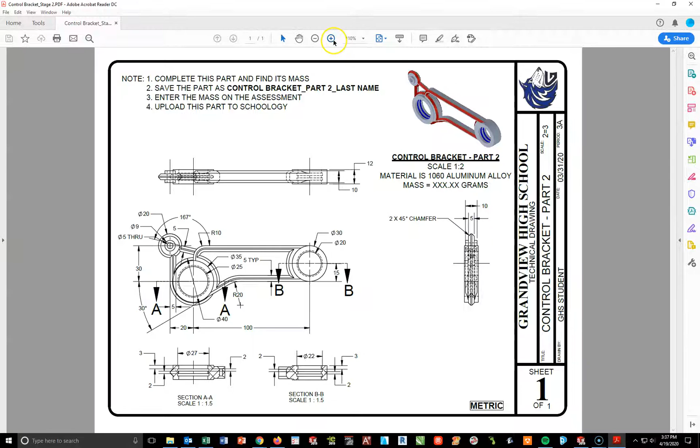The only thing I'm seeing that's different between our original and what we were working on is the distance for this upper circle: instead of 15 it has been moved to 20, and the height instead of 35 has been reduced down to 30, with this angle from 135 turning to 167. Everything else remains the same.

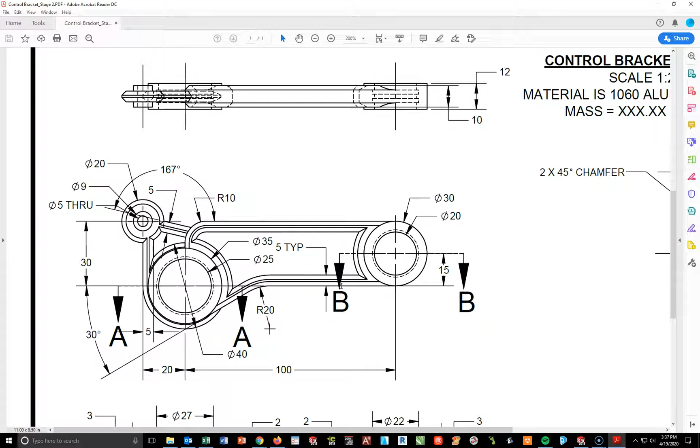The one thing that is being added in, though, is there are two cuts on the inside of each of these circles that we'll have to add in. And what we're going to have to do is actually create a plane that we will end up working with. Since we have our front plane in the middle, we can create a plane that will be based on just an offset at 1 millimeter out.

And then we're going to create a circle on that plane and do a 2 millimeter cut. Okay. If I do that, that puts us in the right spot. We're going to do it on one, and then we're just going to mirror it over. So that's the only other thing we have to add. Oh, and the last thing is we've got to get rid of the thing in the middle here. So this is one big piece. So really, it's just a couple things we have to do to modify this.

Okay. And then now we'll make sure this is done. Beyond that, I think that's all we have to do here. So I'm going to go ahead and get back into my original part. So here is what we finished up with part number one. So now what I'm going to do is kind of come back.

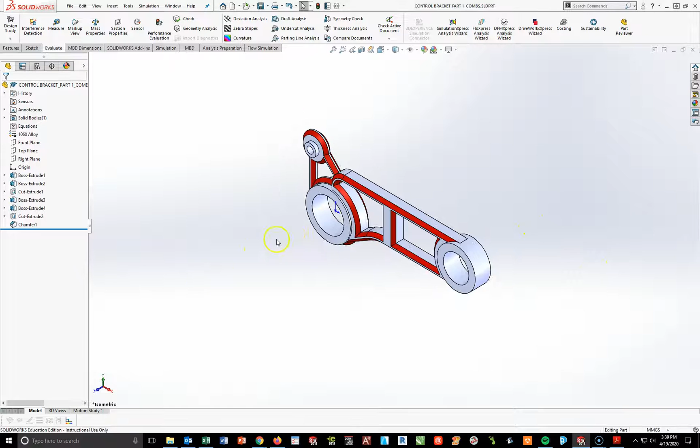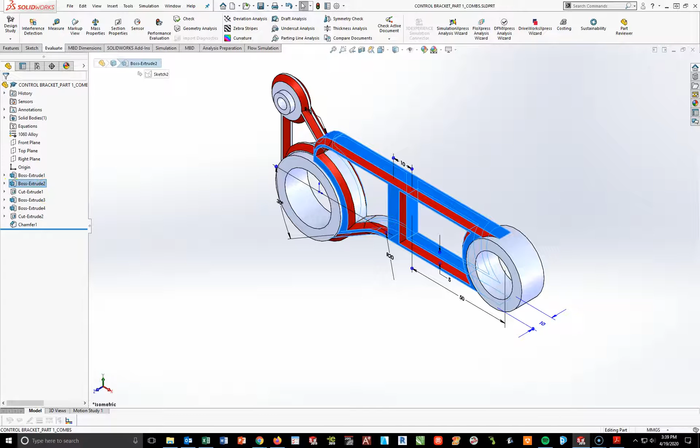These numbers on my first extrusion are okay. It's still a 12 millimeter extrusion. They're still 20 and 30 on the sides of the circle. It's still 35 and 25 on the circles in the back. So that is good. Okay, this extrusion here, I'm going to have to actually go in. What will happen is I'll get rid of this little cut right here. I'm actually going to go into the Boss Extrude 2.

We're going to go in here and edit the sketch, spacebar, Normal To. Now, all I'm going to do in this case is get rid of this vertical line right here, yes, and this line right here, and yes. And then all I'm going to do is just pull this to attach. In this case, I'm going to delete that line and drag this all the way to the back. Okay.

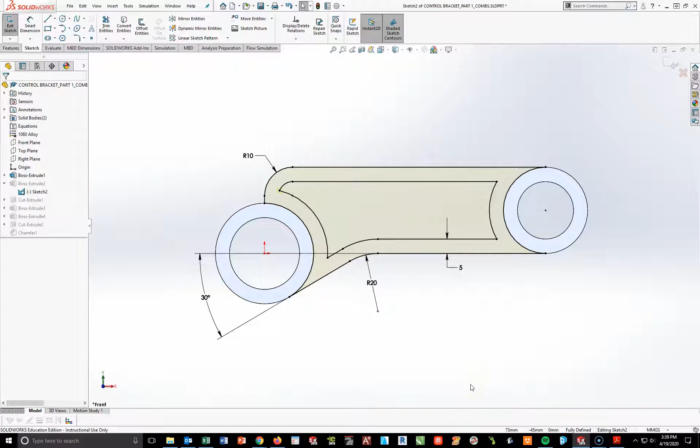This right here, I'm not quite sure if it's just because it's missing a tangent, so maybe I'm just going to add a quick tangent relationship there, and that looks like that's all that was missing. Okay. This was still posing a problem up here earlier. I'm not sure why that is a problem. Let me see if I can go through and do the extrusion. I'm going to continue to ignore.

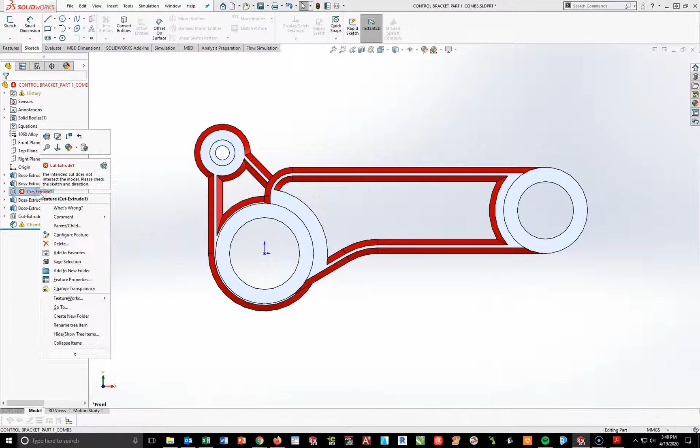Okay. Now the reason this came up is because, if you recall, on the first one I had to do that additional cut. Okay, well now I don't. So all I'm going to do is just delete this, get rid of that cut, get rid of this sketch. Okay, close, right click, and delete this sketch. Okay, so now I am back to where we originally were. Now, as you can tell, I ended up losing all my chamfers by making that cut because the chamfer was part of that. So in the end, I'm going to have to come back and add that on.

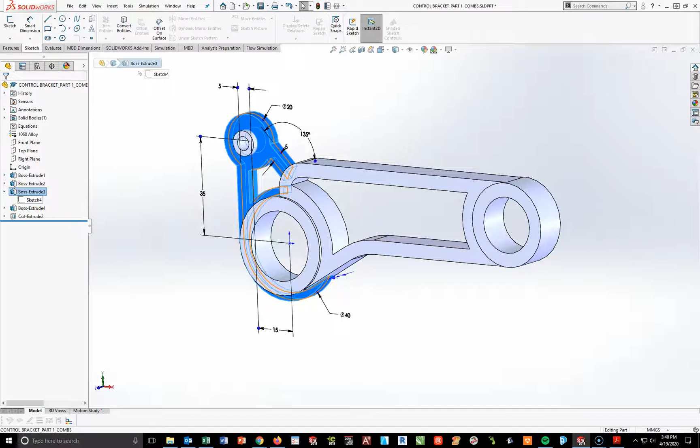Not necessarily what I want to do, but it is what it is. Okay, so that is now done. Now this Boss Extrude is the one that also has changed. So I'm going to come to here, spacebar, normal to, and I'm going to edit this sketch.

Okay, I'm going to take this 135 off here real quick. And what I'm going to do is change this 35 to a 30. I'm going to change this 15 to a 20. Okay, change this value with invalid geometry. And that is because I think I have this point right here is vertical, horizontal. Why would that change my geometry if I take that off of there and change this to 20? Let me see what that does.

Okay, that did work. So let me do this. Oh, I know what it is. Control Z. This is no longer, let me get rid of that. This point right here is no longer, are they on the same line still? Let me just look. This right here should not be vertical to this. That's what it is, okay?

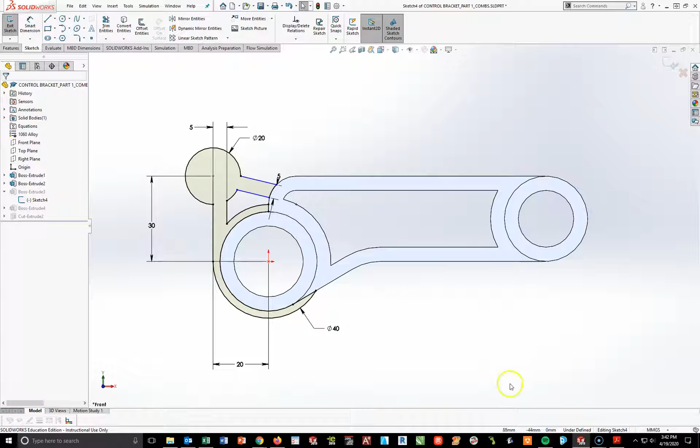If I go to here to 20, that should shift out. This actually now is vertical to this. That's the big shift. Okay, the last thing I have to do, and I apologize again for the confusion there, I need to add in 167, and that should automatically come up. Just go ahead and I'm going to put 167 there, and now it's done. Okay, that is all we had to change.

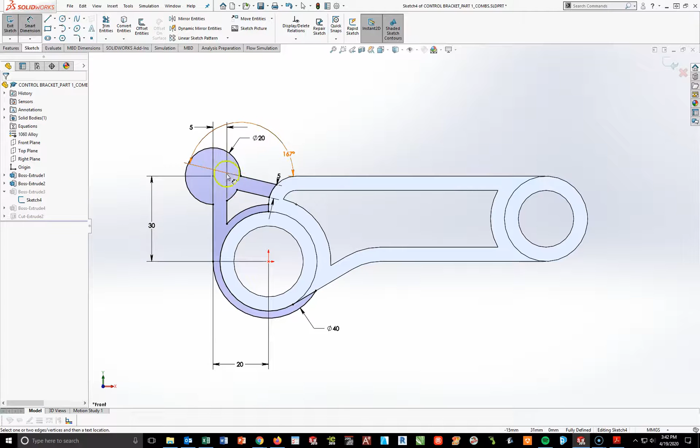Honestly, that was it. Again, the reason that the 20 didn't work is because I had the center locked on this line. I had to break that relationship and shift it. Okay, if I hit my empty out here, this is essentially now done. The only thing that stinks is I have to go in here and add in my chamfers. Okay, but what I'm going to do first, and it doesn't matter, I'll do my chamfers at the end. I am actually going to go ahead and make the 2 cuts on the inside of my circles. Okay, so I'm going to start working on these.

I have a plane going right down the center of this part. And what I'm going to do is take that plane and offset it 1 millimeter to the left or to the right. I don't care which direction you go. It's just going to be 1 millimeter. Why is it 1 millimeter? Because if you look at this closely, this distance here is 2. Well, my plane's right in the middle. That means it's 1 millimeter left and 1 millimeter to the right.

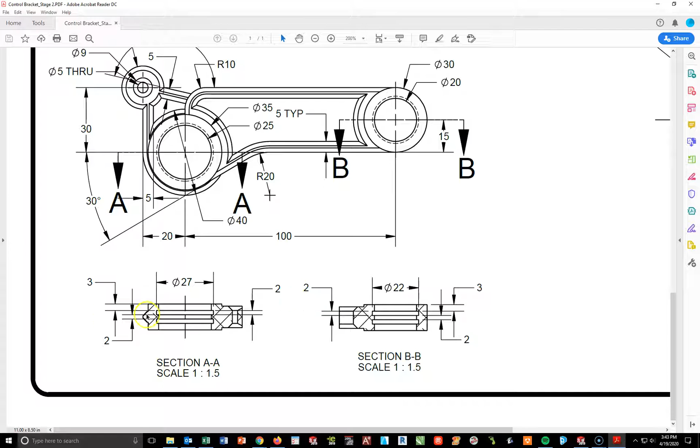All right, so what I'm going to do is just go to my front plane. We're going to add a new plane 1 millimeter away. We're going to create our 2 new circles of 22 and 27, and then we're going to extrude cut those 2 millimeters. I'm then going to mirror that cut over that plane to the other side. Hopefully that just made sense. Okay, so let's go through that.

So I'm going to take my front plane. Okay, and this is some of the advanced stuff we still got to remember. I want to create a new plane. I'm going to make that new plane go back. Okay, so I'm going to hold my control key, and when I see the little cross come up, that tells me I'm on my plane. I'm going to hold my left mouse button and move it. Okay, now the way to make that work is, again, I held my mouse button with my control key down.

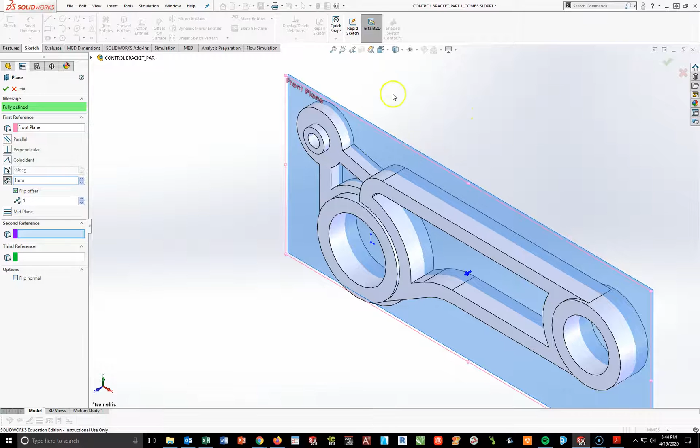Now, I'm going to tell it I want the distance of this new plane to be 1 millimeter. Okay, so all it's going to do is take the plane that's going down the middle and shift it 1 millimeter to the right or left. You can go either direction, I don't care. Okay, I'm going to hit my check mark. I get this new plane.

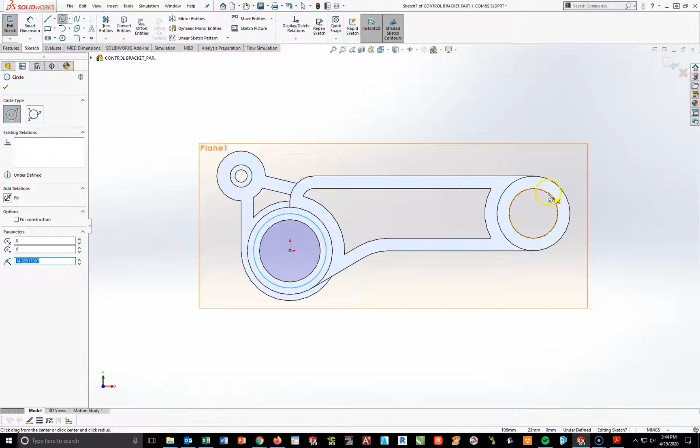Now, while it's light blue, I'm going to start a new sketch, spacebar, normal to. And I'm going to draw 1 circle. Okay, that circle here, I should apologize, 2 circles, and 1 over here.

Okay, this circle over here will be 22 millimeters. This circle over here will be 27 millimeters. Okay, so 22 and 27. Now looking at these, they're slightly off center. Now I'm going to make sure that I extrude cut these this way towards the back.

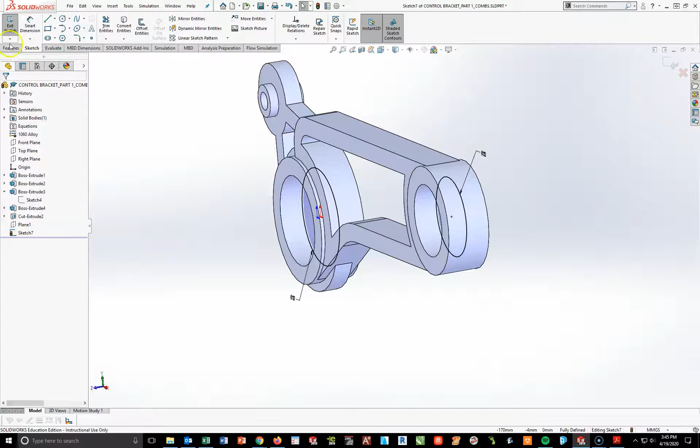Okay, now in this case, I'm going to hide my plane. I don't like a bunch of planes on my screen. So I'm going to go over here to the left and right click. Then I'm just going to hit the eyeball for hide. I'm now going to go to features, extruded cut. Okay, and I want to go from here 2 millimeters.

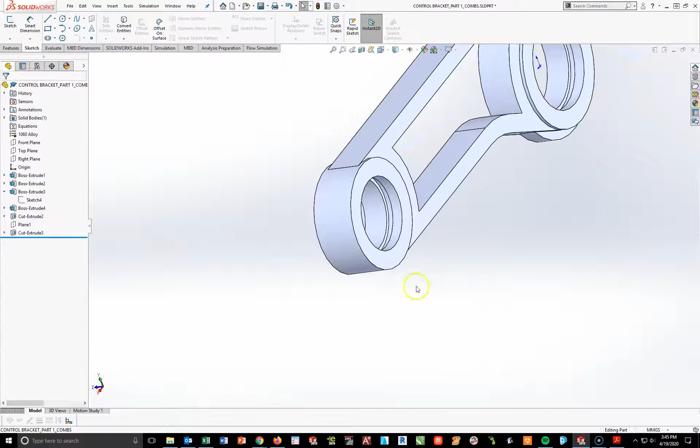Okay, so what's going to happen is this circle is going to cut from here over 2 millimeters, creating a small channel on the inside of each circle. I'm going to hit my check mark. So there's that channel right there that we're looking at. Okay, now again, if you want to see that, I'll actually color it in just a second here so you can see that. Now from here, I'm just going to go to features, mirror.

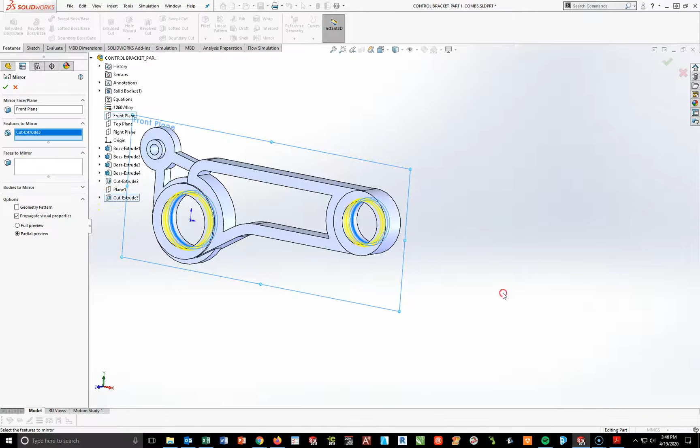I'm going to mirror it around my, expand this menu, front plane, and the feature I want to mirror is this extruded cut. So what's going to happen is there's the plane right down the middle, and now it's going to take this cut and mirror it over to the other side.

Check mark. Okay, so now there are the 2 channel cuts, and I'm going to go ahead and add a color to those, so you can see those are the same that are in the drawing provided to you. We'll make those nice and blue. Okay, I'm going to do the same thing with the mirror. Okay, so there's those 2 cuts. So the last thing I've got to do is come in here and add in those chamfers.

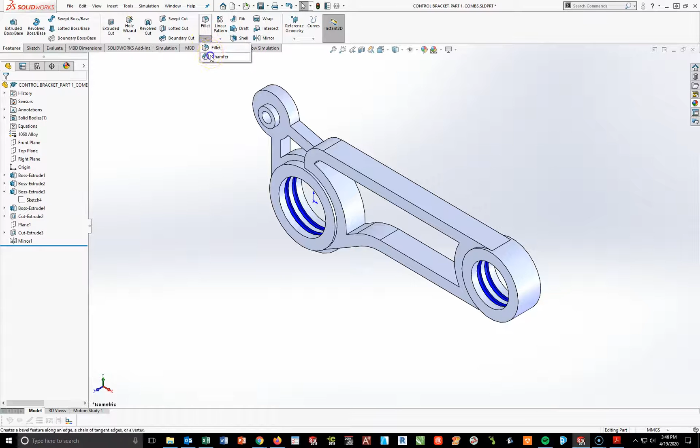Now, unfortunately, when I deleted that stuff, I had to come back and do this again. It's a little bit of work. I apologize that that got deleted. Okay, but I'm going to take my time because I'm almost done with this. I'm just going to kind of work around, hit every one of these edges just like we did in the previous one. Okay, going to this side. Again, all the inside edges here.

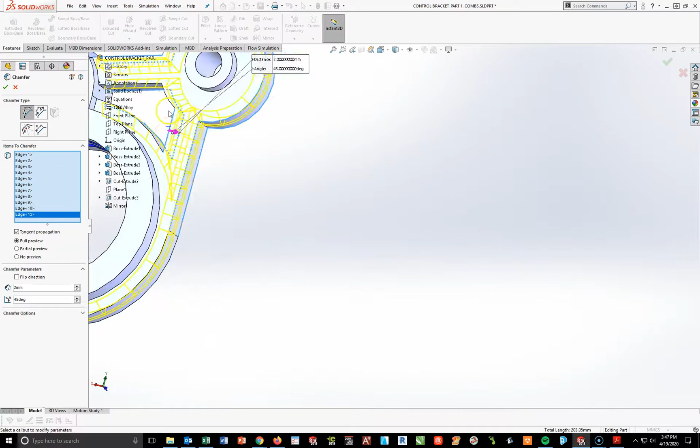All right, again, if you want to do this in trials and phases a little bit at a time, it's up to you. The faces won't work. That I don't want to hit. I want to hit this outside edge. Okay, this outside edge. Rotate around. I'm going to hit this outside edge and that outside edge.

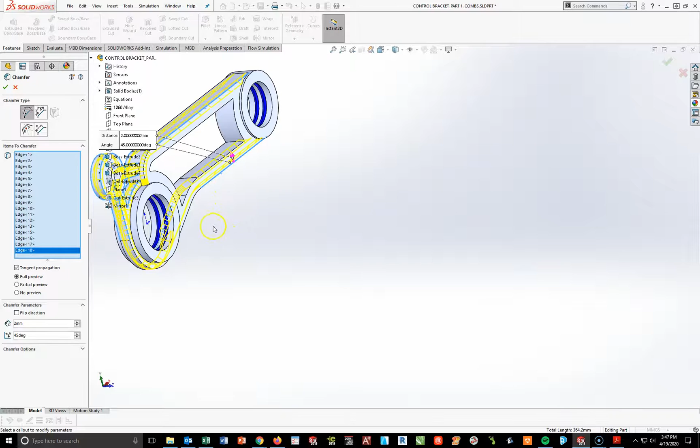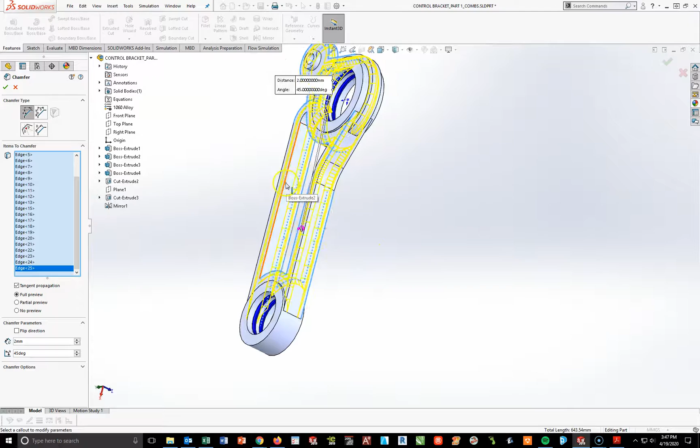Okay, now hopefully if you were lucky, you may have not lost your chamfers. If that's the case, congratulations. That's awesome. That saves you a huge step. Okay, and I'm going to go in here, and I'll come back and add the color on those so you can see what's going on and make sure that you are doing the right thing. Okay, and I think that's all my chamfers back. I know it was confusing, so let's hit our check mark and add color.

That looks pretty good right there. Isometric. I'm going to go in here to chamfer, beach ball, and again, you don't have to do this. I just want you to be able to see what I'm working with. And I believe there is all of the chamfers back with our 2 subsequent cuts.

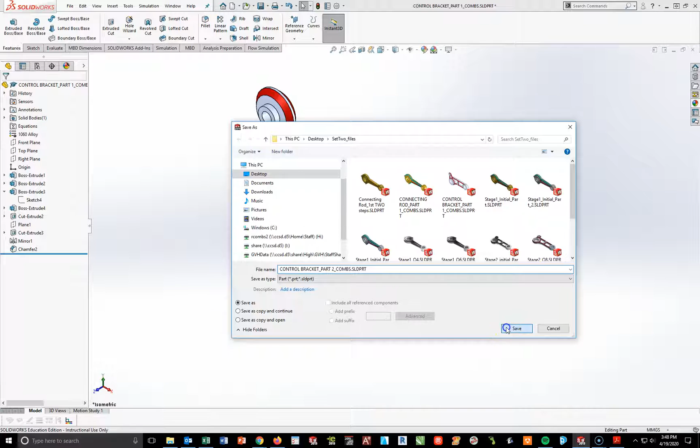So at this point, don't hit save, because if you do, you're going to wipe out part number 1. I want to quickly do a file save as. I want to call this control bracket underscore part 2 underscore my last name and hit save. All right, now that you're done with this part, I would like you to go to your evaluate and mass properties, find the mass properties for this part, and then input that into the assessment in Schoology.

Okay, at this point, part number 2 is complete. Make sure you've saved it, and then you are to upload this to Schoology after you've entered your mass. Okay, I'm going to have another video in just a second here for part number 3.